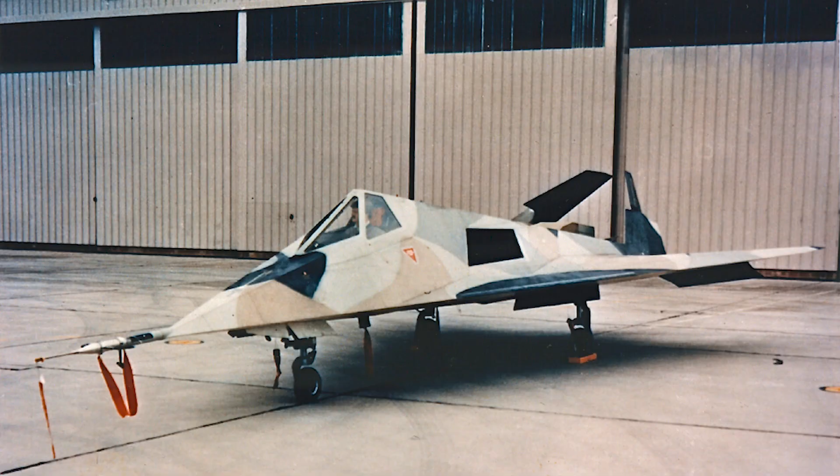And of course, the Have Blue was kind of cobbled together with as many off-the-shelf parts as possible. That was partly for cost, but also for security reasons, just to minimize the risk that someone could figure out what they were working on. So I've done a lot of research, tried to look through photos very closely, tried to look through various articles that folks have written over the years, and I found some interesting things.

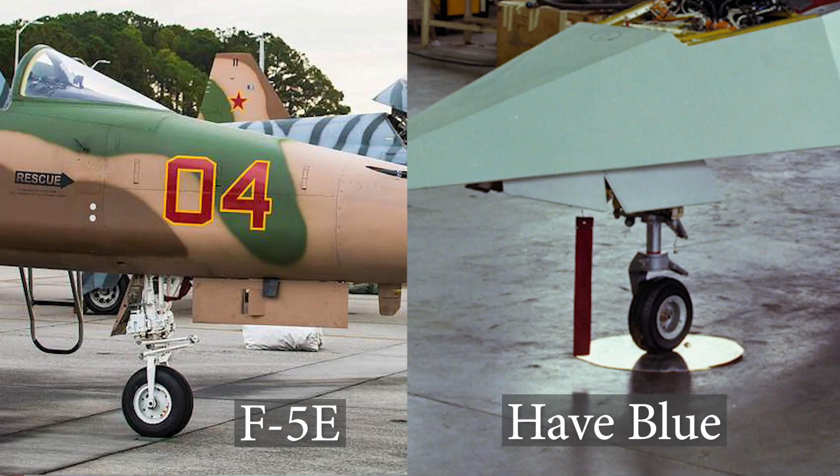So first, I spent some time looking through some of the photos and tried to identify whether or not the landing gear was anything I could recognize. In terms of the nose gear, I spent a lot of time looking at a variety of aircraft. I had seen some comments that maybe F-5s or T-38s had been used. However, on closer inspection, none of the forks for the nose wheel or any of the scissors on the front looked anything like any of the aircraft that I had seen suggested.

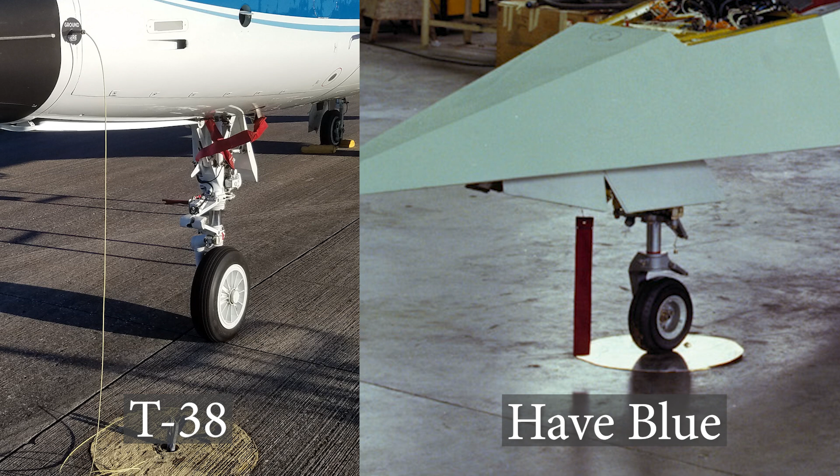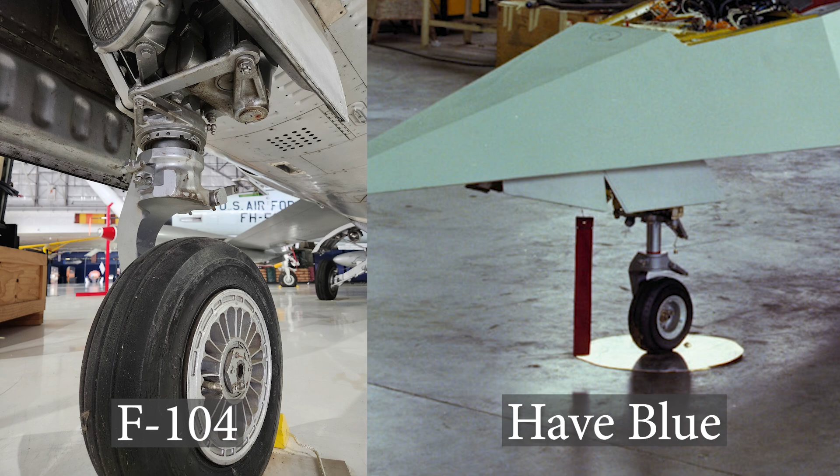So I kept looking around and eventually found one that seemed to be a pretty good fit, and that appears to be the F-104. Now this could make sense partly from the standpoint that it's another Lockheed aircraft. But the way the fork comes back, the way the actuation moves up forward, and the size and shape of the tire all seem to be fairly consistent with a late model F-104. So I'm pretty convinced that that's the case.

In addition to that, I did see one comment from an engineer from Lockheed in an article that suggested that the aircraft had used F-104 main gear and T-38 nose gear, but I think those may have been swapped. So my thought was, maybe the T-38 gear is used in the mains and the nose gear was the F-104.

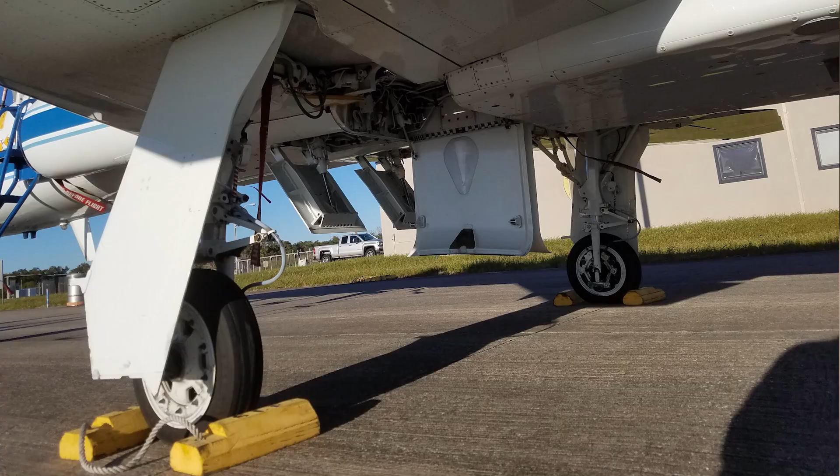After looking more at the main gear, on the T-38 the landing gear doors, of course, come towards the middle of the aircraft. They don't swing forward like they do on the Have Blue, so I spent some more time trying to figure out what could possibly go on there.

It's quite possible that in order to actuate the gear forward, Lockheed had designed it such that they changed the orientation of the tires and just rotated the whole fork and the whole trunnion and everything and made it go forward. The forks on the main gear do not look like anything else I could find. So it's quite possible that they just replaced that lower portion of the main gear so that it could rotate around.

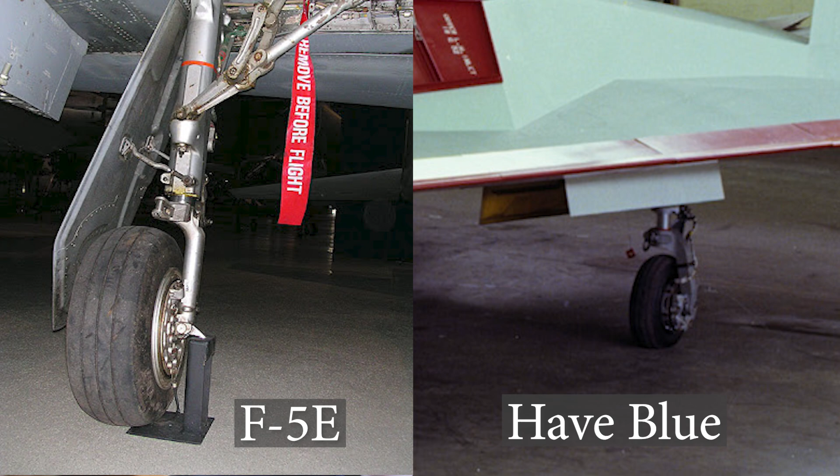Now that may have required some welded-on fittings to handle the little scissor part in the back that helps keep the wheel straight and provides a place for the brake lines, etc., to move around without getting caught in the oleo strut. So it's possible that they went through some extra effort there. I couldn't find anything that could easily be recognized off the shelf for that.

I'd seen some suggestions of maybe even A-10 landing gear, which makes more sense for the F-117, but that's a much bigger airplane. The Have Blue aircraft was more the size of a T-38, so it's much smaller and lighter.

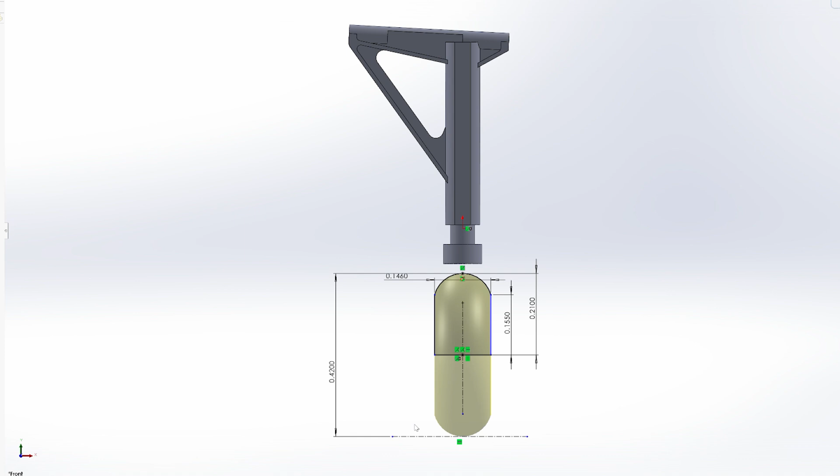So additionally, I started playing around with the CAD. I started trying to design the main landing gear, assuming it was a T-38, and just see how that fit. So I got some dimensions from a book, which, well, I don't have that in front of me, but I will pull it out. Oh, wait, here it is.

So it's one of the Daco books. This has in the back some line drawings for a T-38, and that includes some of the main and front landing gear. So check that out for sizing. I researched what size tires are used on the T-38, scaled the drawings, and tried to see how that fit.

So when I plugged it into the CAD geometry, assuming that I've rotated the whole gear assembly 90 degrees, something kind of interesting came out of that. If you've seen F-5 or T-38 landing gear, they have kind of a forward rake to them. The tire sits forward of where the strut actually comes up into the wing, and that makes for an interesting angle.

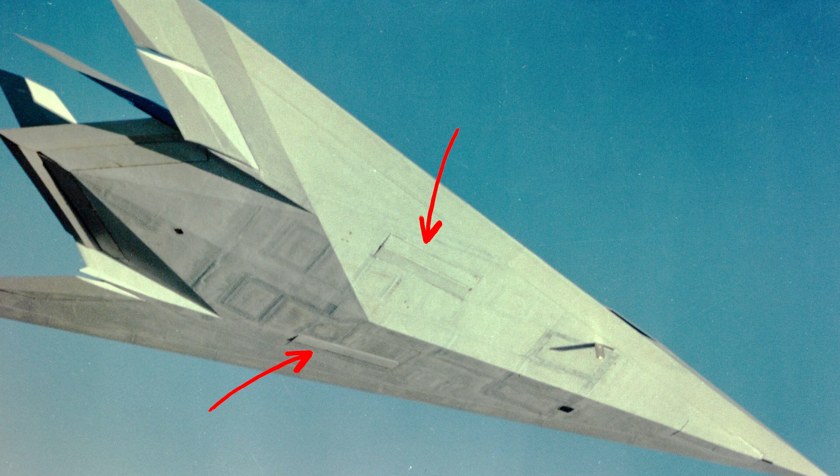When you rotate it 90 degrees, the gear tends to come a little bit towards the middle of the aircraft as it comes up. And one thing you may notice with the pictures of the Have Blue is that those landing gear actually do come a little bit inboard. Originally, when I drew up the first models, I didn't have the landing gear in place. I just used some existing photos to try and estimate where those gear doors would be.

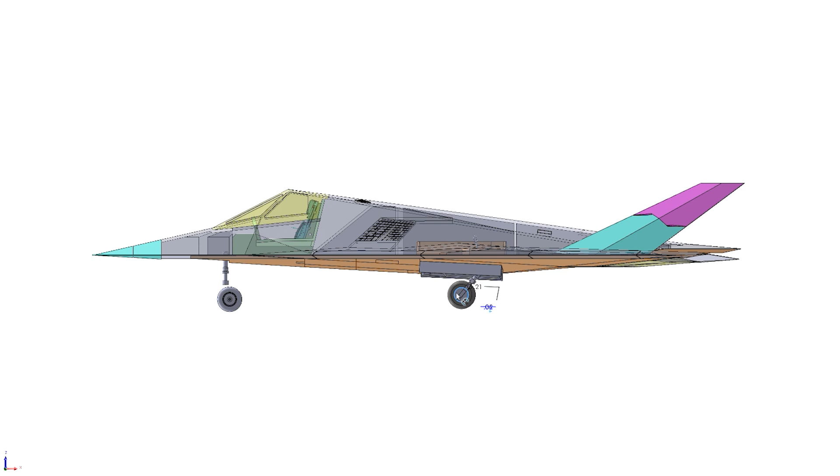And it turns out that that angle is very close to the same angle that the landing gear tends to come up from a T-38. So it's quite possible that is the case. You can probably see in the CAD geometry, it actually fits well when it rotates up. The gear moves a little bit inboard, as well as positioning the tire in about the right location where you'd expect it to be.

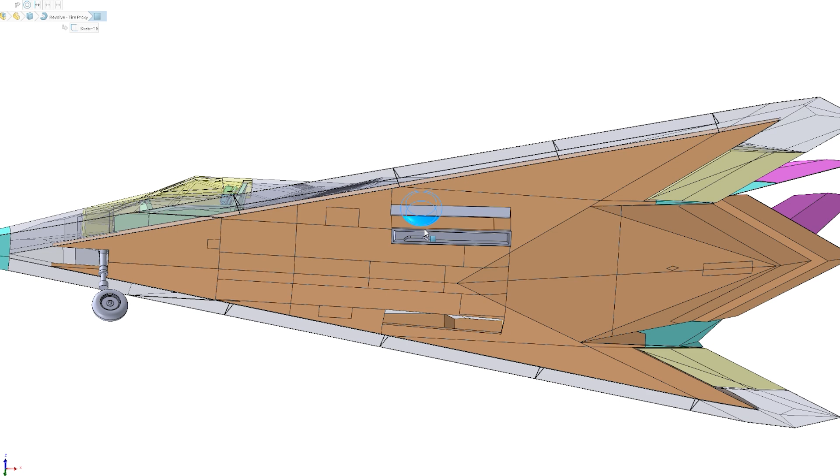So it's certainly possible that they used a modified T-38 gear, and that's what I'm going to go forward with, assuming that that was the case, unless someone else can provide some better documentation to explain a different theory on that.

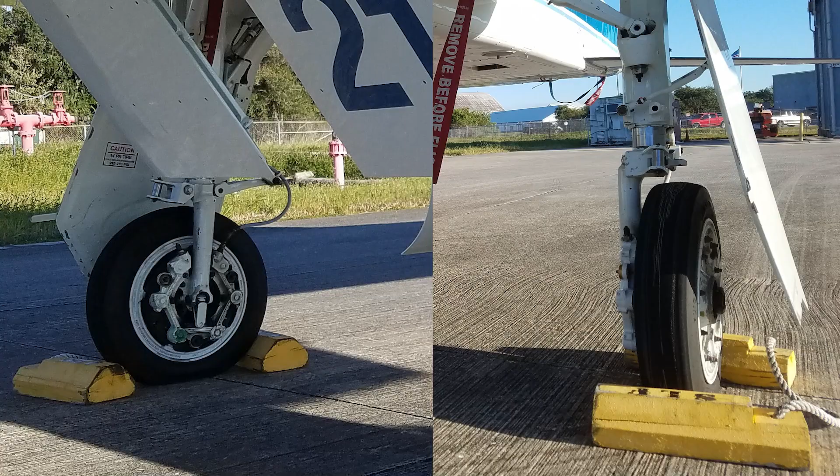Now, one thing about the T-38 is they do have fairly unique tires and wheels. They have a very large tire rim and a very narrow tire. Looking at the photos of the Have Blue, it does not look like that aircraft used T-38 wheels and tires. So I tried to see whether or not it might be an F-5. That does not appear to be the case either. F-5s have slightly larger tires, but the shape wasn't quite right. The brake assembly on the main gear also didn't look quite right.

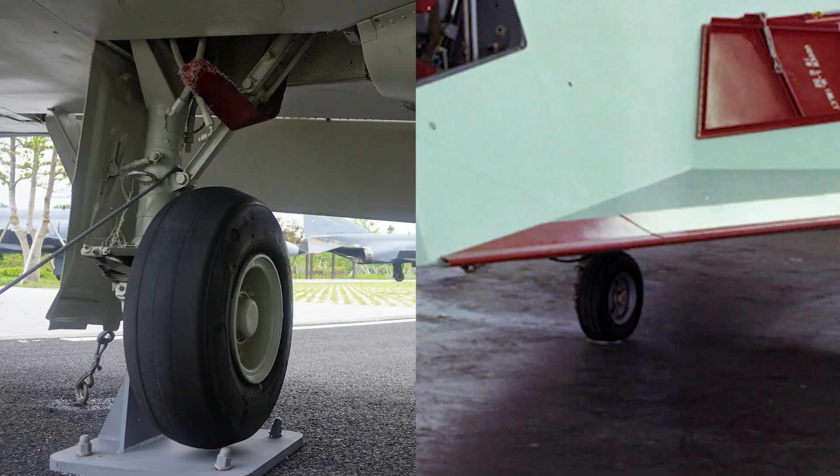So I spent a lot of time looking at different aircraft to see what might actually have been used there, and the best fit I could come up with was an A-37 Dragonfly. If you look at the tires on an A-37, it's hard to find good pictures because there are usually big fuel tanks right close to the landing gear. But if you get a good shot of it, you can see that the tire geometry looks very similar to what you can see in the Have Blue photos.

And the brake system on that wheel looks very similar to what I can see on the Have Blue. So it's quite possible that they used the A-37 wheel, tire and brake assembly on the fork that they built for the landing gear. It looks like that may be custom from basically the oleo strut down to where the brake assembly is. So that's what I'm going to start using as the basis for my design, and we're going to move forward with that.

I have to go get some more information on the F-104 nose gear, and see why they didn't use the T-38 gear for the nose. I'm not sure. It's a similar space, but if I had to guess, they may have wanted something a little more rugged, because the Have Blue didn't have a lot of pitch authority and they were afraid the nose may come down a little hard. Or maybe there were some minor geometry issues that caused them to go that route.

But in any case, that's my best estimate as to what was actually used on the Have Blue. But again, there's very little documentation out there, at least in the public domain. So if anybody has anything better, please let me know. But for now, that's what we're going to go with.